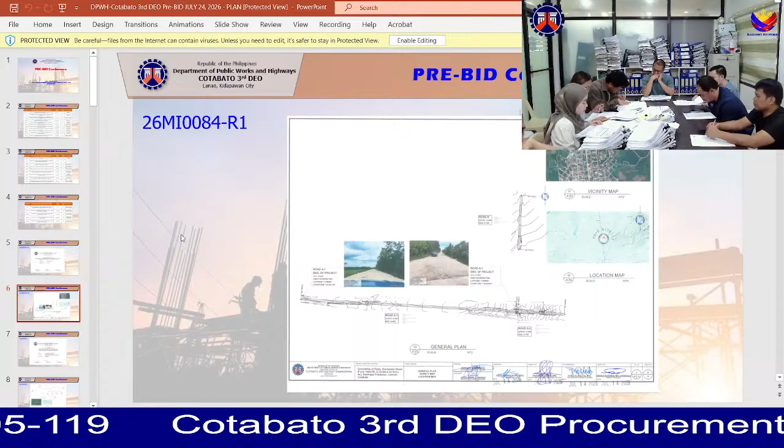Minimum equipment requirement, we have 2 dump trucks, 1 payloader, 1 bulldozer, 1 backhoe with breaker, 1 payloader at the disposal area, 1 backhoe, 1 plate compactor, 1 water truck or pump, 1 motorized road grader, 1 vibratory roller, 4 transit mixer, 2 concrete vibrator, 1 concrete batching plant, 1 concrete spreader, 1 concrete saw, 1 bar cutter, 1 bar bender, 1 cargo or service truck, 1 bagger mixer, 1 backhoe wheel mounted, 1 cargo or service truck, and 1 applicator machine, 1 kneading machine.

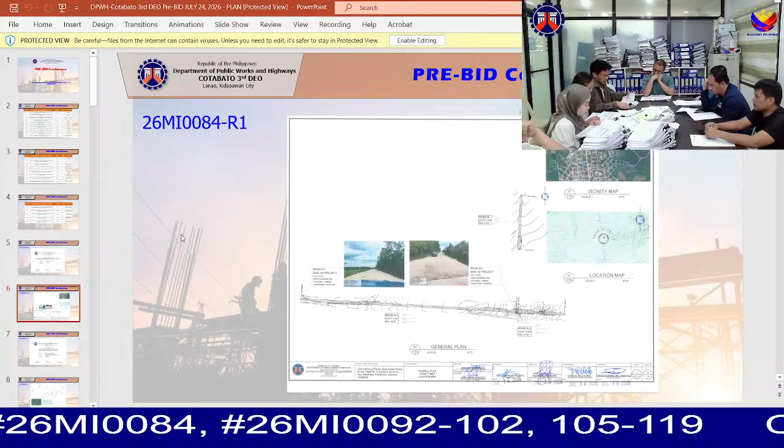For the second project, we have a contract number of 26MI0092. Project name, construction of road widening along Matalam-Lampayan-Antipas Road, kilometer 1660 plus 869 to kilometer 1662 plus 000, kilometer 1662 plus 442 to kilometer 1662 plus 653, kilometer 1663 plus 742 to kilometer 1663 plus 815, kilometer 1667 plus 000 to kilometer 1668 plus 535.

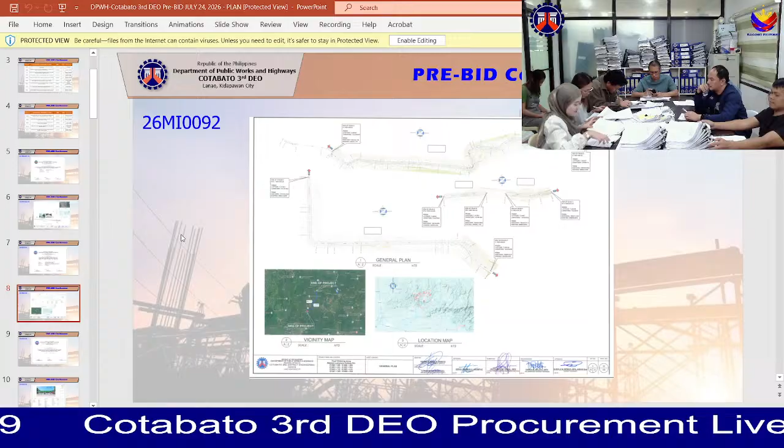Under subbase and base course, we have aggregate subbase course. Under surface courses, we have Portland cement concrete pavement, 0.15 meter thickness. Portland cement concrete pavement, unreinforced, 0.2 meter thickness. And also Portland cement concrete pavement, unreinforced, 0.28 meter thickness. Under bridge construction, we have reinforcing steel, grade 40, reinforcing steel, grade 60, structural concrete, class A, structural concrete, class B. Under drainage and slope protection structures, we have pipe culverts, 910 millimeter diameter, class 2 RCPC, manholes, 910 millimeter diameter concrete, catch basin, 910 millimeter diameter, grouted riprap, class A, stone and stone masonry.

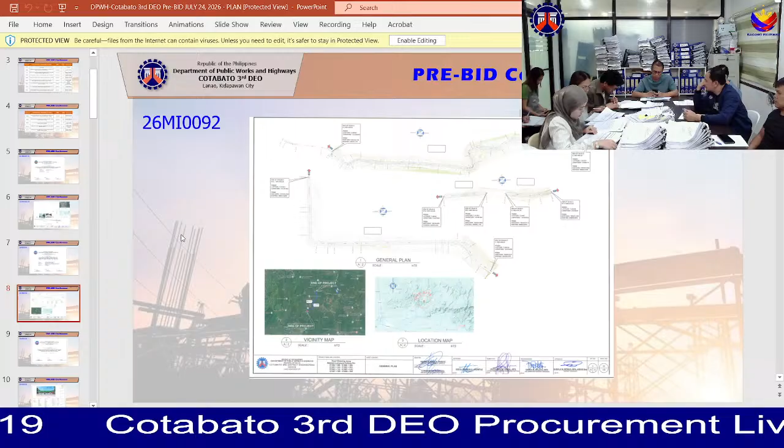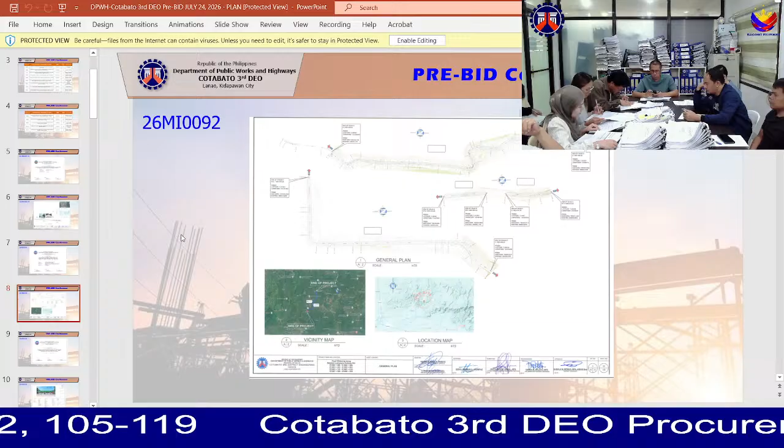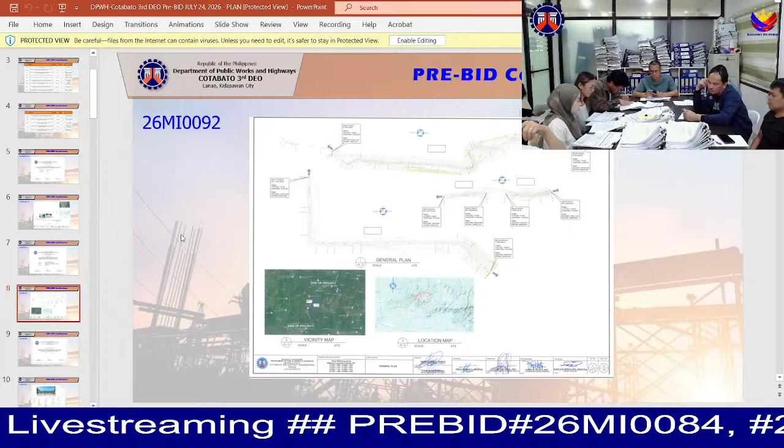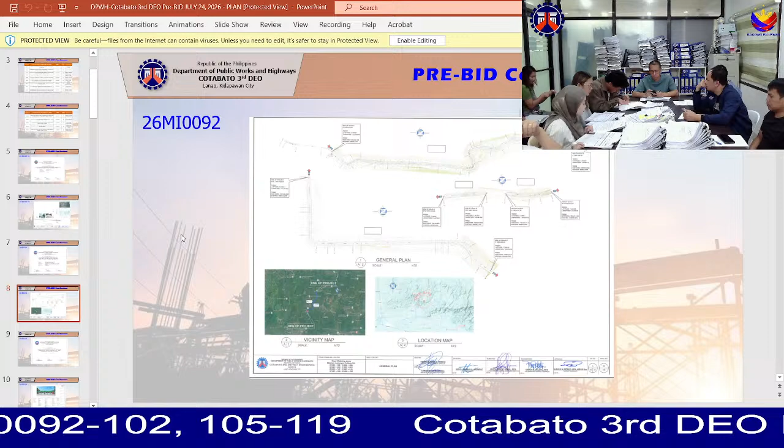Minimum equipment requirement, we have 2 dump truck, 1 payloader, 1 bulldozer, 1 backhoe, 1 chainsaw, 1 backhoe with breaker, 1 drill truck, 1 payloader, 1 plate compactor, 1 water truck or pump, 1 motorized road grader, 1 vibratory roller, 4 transit mixer, 2 concrete vibrator, 1 concrete batching plant, 1 concrete spreader, 1 concrete saw, 2 bar cutter, 1 joint sealer, 1 bar bender, 1 cargo service truck, 1 bagger mixer, 1 backhoe, wheel mounted, 1 cargo service truck, 1 applicator machine, and 1 kneading machine.

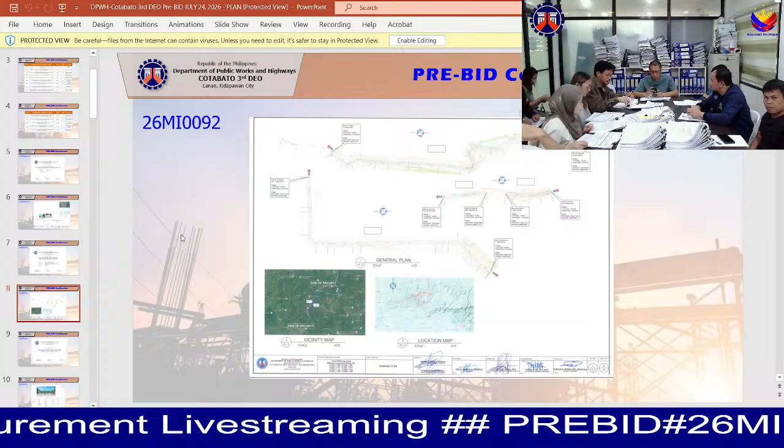For the third project, with the contract ID number 26MI0093, the project name is Construction of Multipurpose Building for SPED Students of Kabacan Pilot Center Elementary School, 130005, Barangay Poblacion, Kabacan, Cotabato. The project location is at Barangay Poblacion, Kabacan, Cotabato. The contract duration is 130 calendar days. The funding agreement is General Appropriation Act, FY 2026. Infra type is building, target amount is 1, unit of measure is unit.

The approved budget for the contract is 5,940,000 with an EL of 60,000, so the estimated project component cost is 6 million. The description of work to be done for this project are facilities for the engineer, other general requirements, earthwork, reinforced concrete, finishing and other civil works, electrical and mechanical.

Under the facilities for the engineer, we have construction of field office for the engineer. And under the other general requirements, we have permits and clearances, project field order signboard, occupational safety and health, mobilization or demobilization. Under the earthworks, we have structure excavation common soil, embankment from roadway or structure excavation common soil, embankment from borrow common soil, and gravel fill.

Under the reinforced concrete, we have structural concrete class A 28 days, reinforcing steel deformed grade 40, and formworks and falseworks. Under the finishings and other civil works, we have catch basin concrete, sewer line works, storm drainage and downspout, septic vault or tank, concrete CHB, plumbing fixtures, cold water lines, ceiling 4.5 mm metal frame fiber cement board,

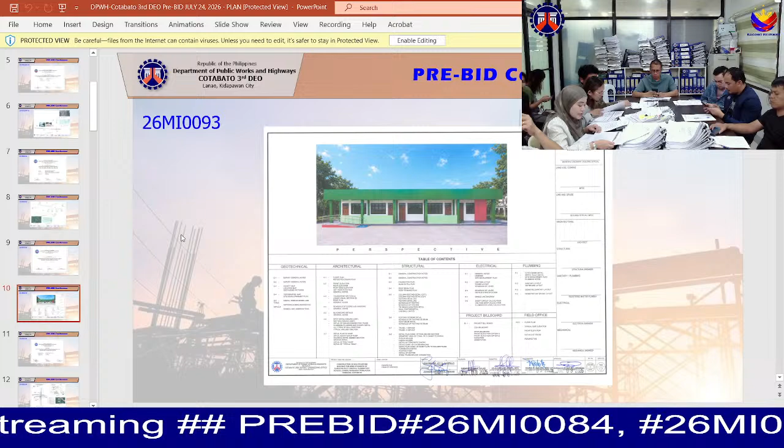ceiling metal frame, pre-painted metal panel, carpentry and joinery works, aluminum glass windows, wooden doors and windows, fabricated metal roofing accessory gauge 24, 0.701 mm gutter, pre-painted metal sheets long span, corrugated type above 0.427 mm, glazed tiles and trims, unglazed tiles, cement plaster finish, painting works masonry or concrete, painting works steel, reflective insulation, aluminum

cladding, CHB non-load bearing including reinforcing steel 100 mm, CHB non-load bearing including reinforcing steel 150 mm, metal structure accessories, structural steel trusses, structural steel purlins. Under the electrical, we have conduits, boxes, and fittings, conduit coils or conduit rocking, wires and wiring devices, panel board with main and branch breakers, and lighting fixtures.

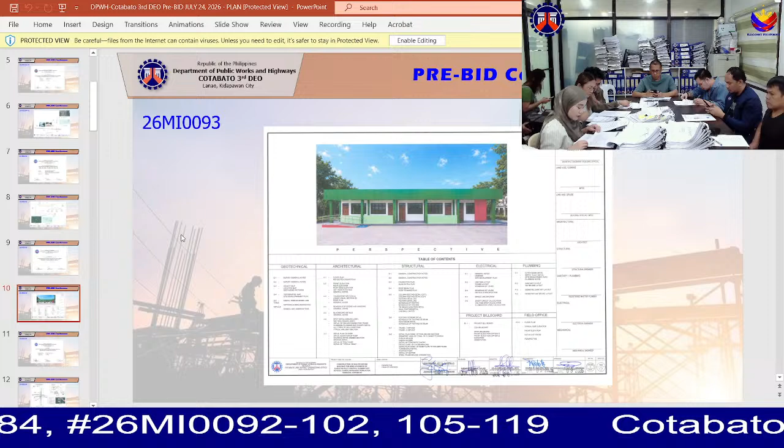Under mechanical, we have oscillating fan, ceiling fan, fire extinguisher 9.007 kilogram ABC with bracket, and fire alarm system. The minimum equipment requirement, we have one backhoe, one bar bender, one bar cutter, one shovel, vibrator, one cutting outfit, two dump trucks, one bagger mixer, one plate compactor, one truck mounted crane, and two welding machines.

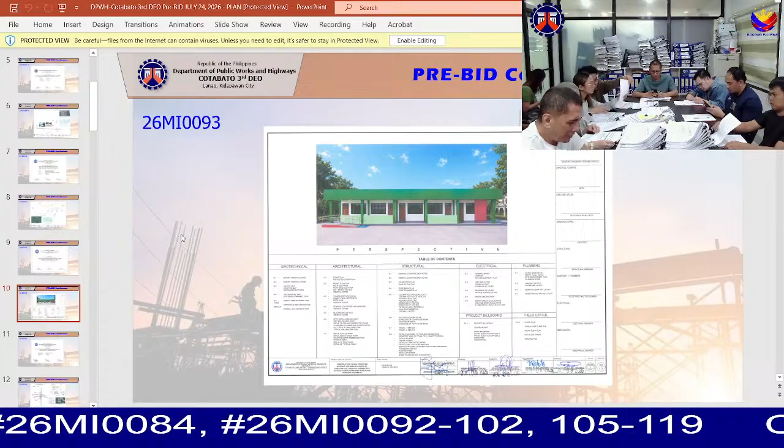Our fourth project is the retrofitting, strengthening of permanent bridges, Bual UK bridge, B01011MN along Makilala-Allah. The work location is along Tulunan, North Cotabato with a contract duration of 108 calendar days. Funding agreement is year 2026. The infra type is bridge. Target amount 1, unit of measure number of bridge. The total construction cost is 16,275,840. The EL is 332,160. And the total estimated cost is 16,608,000.

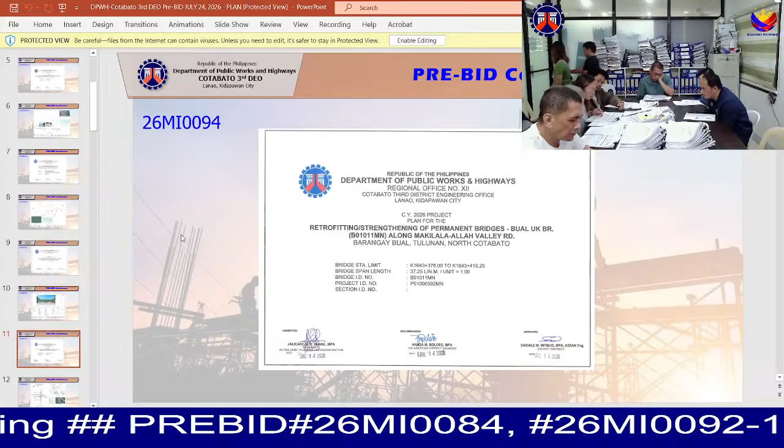The description of works to be done are the facilities for the engineers, the other general requirements, the earthworks, sub-base and base course, the surface course, the bridge construction, drainage and slope protection structures, and the miscellaneous structures. Itemized breakdown. Facilities for the engineer is the construction of field office for the engineer, the provision of furniture and fixtures, equipment and appliances for the field office for the engineer, and the provision of 4x4 type pickup service vehicle for the engineer on bare rental basis.

Other general requirements are the permits and clearances, the project billboard and signboard, the occupational safety and health program, the traffic management, mobilization, demobilization, and the removal and mitigation of bridges. For earthworks, the clearing and grubbing, individual removal of trees, the removal of structures and obstructions, concrete, the structure excavation, the foundation fill, the pipe culverts and drains excavation, and the embankment from borrow. The sub-base and base course is the aggregate sub-base course.

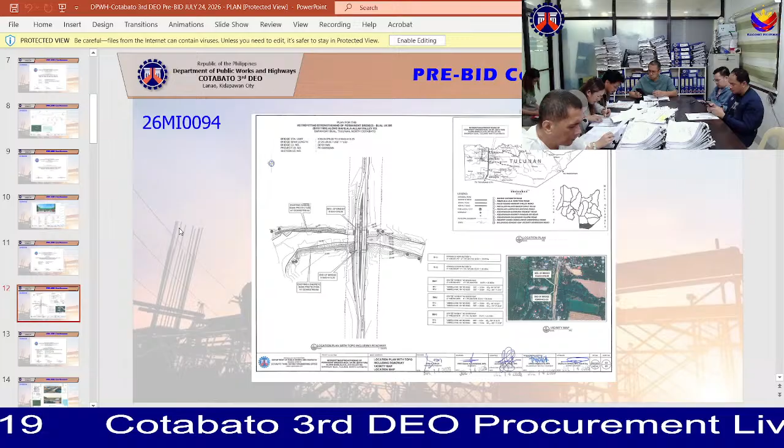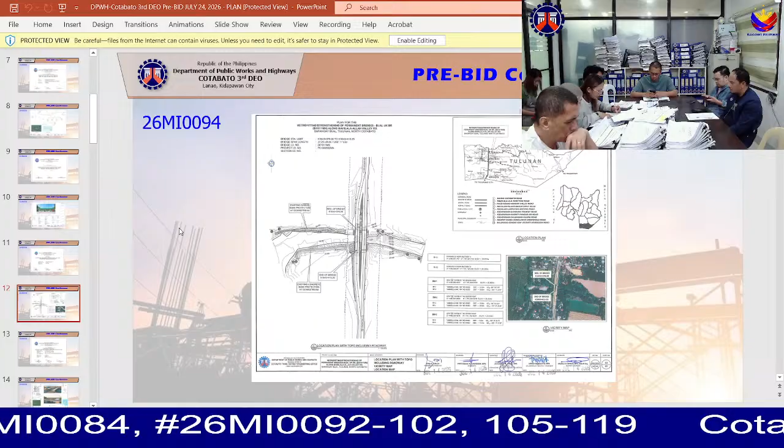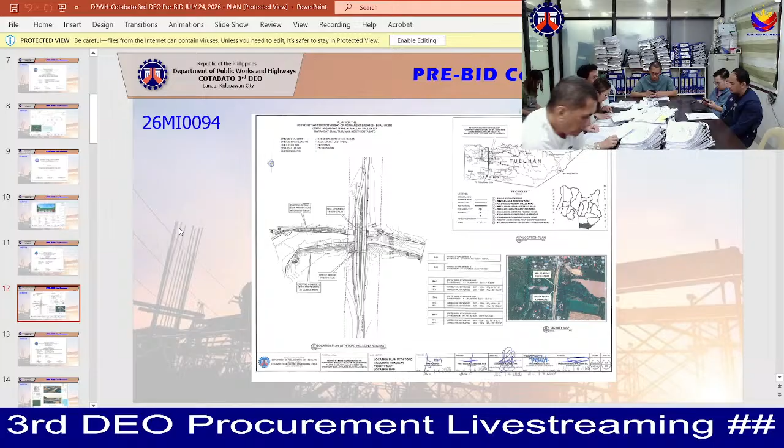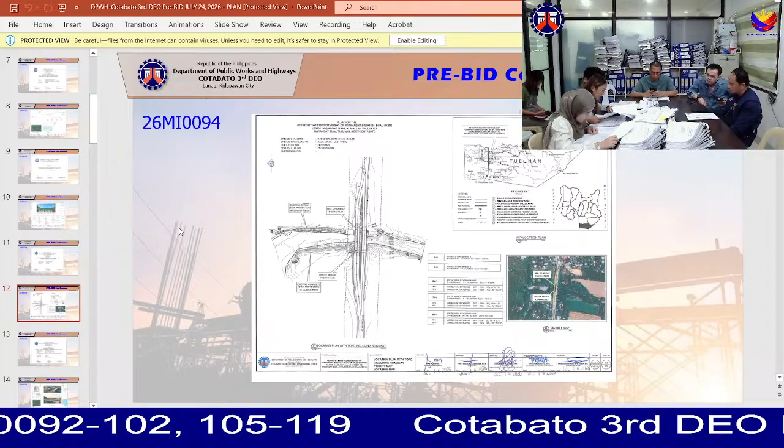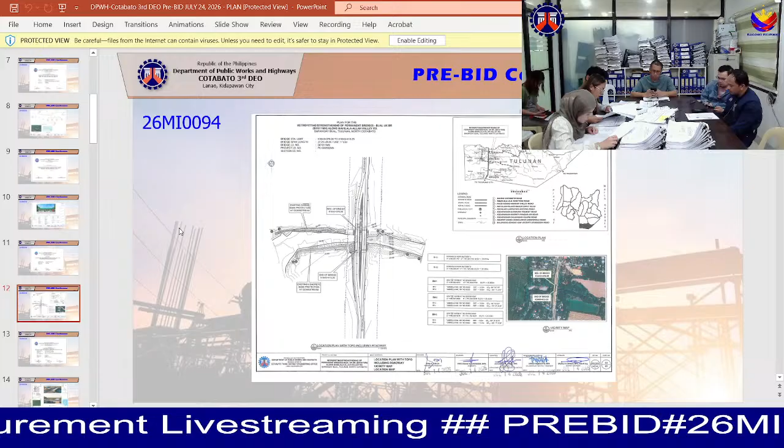dredger, one bagger mixer, one payloader, one plate compactor, four transit mixer, one truck-mounted tipping bucket, one truck-mounted crane standard lattice boom, one truck-mounted crane standard lattice boom 41 to 45 HP, one vibratory roller, one vibro hammer, one water truck or pump, one welding machine, and one welding machine driven, DC output.

For the fifth project, we have a contract number of 26MI0095, widening of bridge, BIALONG bridge 00278, along MATALAM-LAMPAYAN-ANTIPAS junction. Project location, we have Cotabato. Contract duration 190 calendar days. Funding agreement FY 2026. Infra type bridge, target amount 197.669, unit of measure square meter.

Total approved budget for the contract, we have 22,057,840. EO 450,160. And total estimated cost 22,508,000. Description of works: facilities for the engineer, other general requirements, earthworks, subbase and base course, surface course, bridge construction, drainage and slope protection structures, and miscellaneous structures.

Under facilities for the engineer, we have construction of field office for the engineer. Under other general requirements, we have permits and clearances, project billboard or signboard, occupational safety and health program, traffic management, mobilization or demobilization, and removal and relocation of utilities.

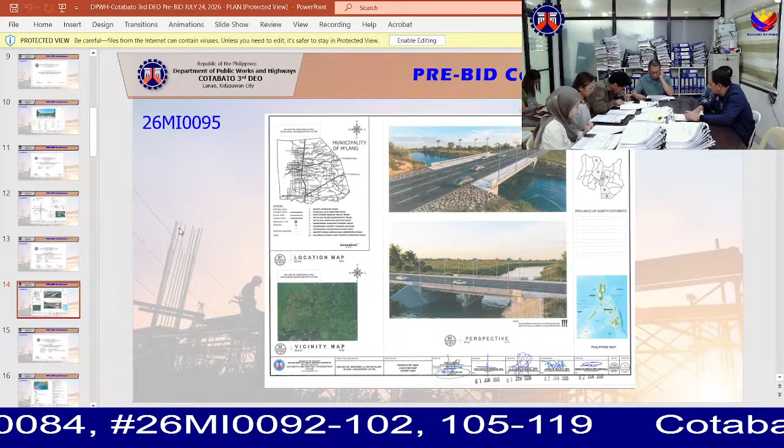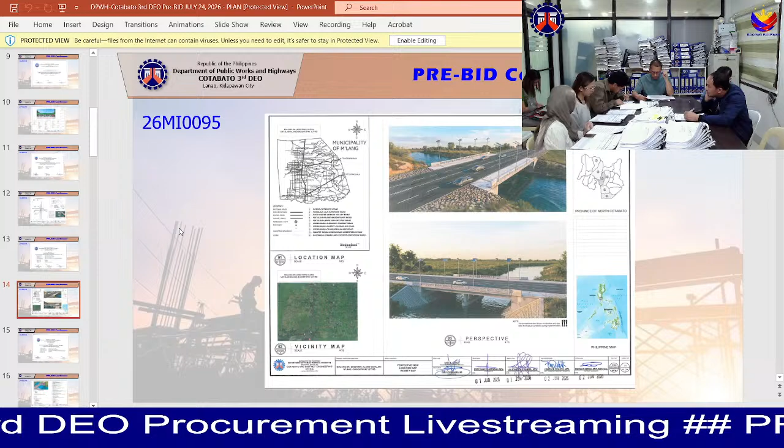mounted crane with bucket, one truck mounted crane standard, one truck mounted crane standard lattice boom, 246 HP, one vibratory roller, one vibro hammer, one water truck or pump, one welding machine gas or diesel driven, and one welding machine electrical driven.

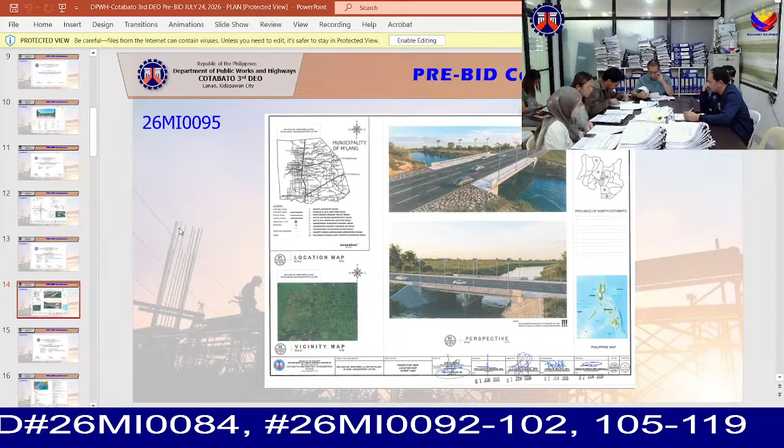For the sixth project with the contract ID number 26MI0096, the project name is Widening of Permanent Bridges - Dalapuan Bridge B01873MN along MATALAM-LAMPAYAN-ANTIPAS Road. The project location is at Barangay Chibia, Matalam, Cotabato. The contract duration is 211 calendar days. The funding agreement is National Expenditure Program CY 2026. The infra type is bridge.

The target length is 322.643 and the unit of measure is square meter. The approved budget for the contract is 36,173,760 with an EO of 738,240. So the total estimated cost is 36,912,000.

The description of works to be done for this project are facilities for the engineer, other general requirements, earthwork, subbase and base course, bridge construction, drainage and slope protection structures, miscellaneous structures, and materials details. Under the facilities for the engineer, we have construction of field office for the engineer.

Under the other general requirements, we have permits and clearances, project billboard and signboard, occupational safety and health program, traffic management, and mobilization or demobilization. Under the earthwork, we have individual removal of trees, 150 to 300 millimeter diameter small, removal of structures and obstruction, concrete, structure excavation common soil, embankment from roadway or structure excavation common soil, and embankment from borrow common soil. Under the subbase and base course, we have aggregate subbase course.

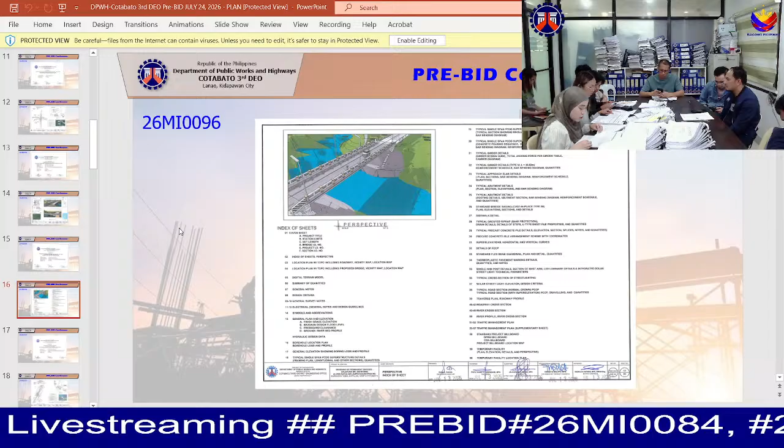Under the drainage and slope protection structures, we have grouted riprap class A, sheet piles, steel slope protection, and drain pipe galvanized. Under the miscellaneous structures, we have metal guardrail, metal beam including post single W beam, metal beam end piece fishtail, reflectorized thermoplastic pavement markings white, reflectorized thermoplastic pavement markings yellow, tapered solar LED roadway lighting 8 meters, 60 watts to 100 watts.

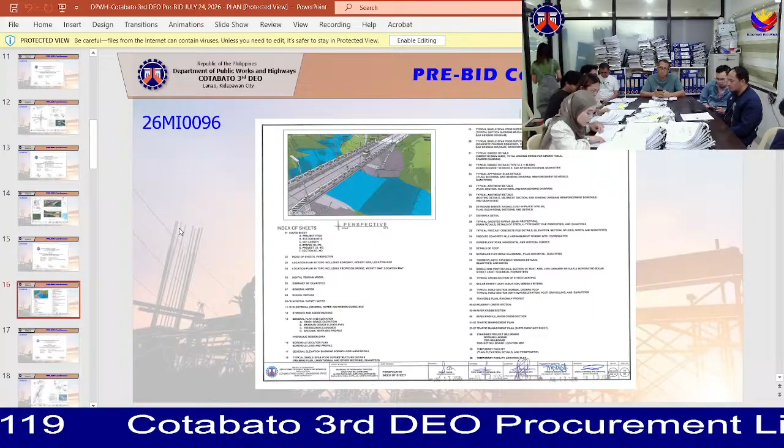The minimum equipment requirements for this project: 1 bulldozer, 1 loader, 1 motorized road grader, 1 motorized grader with scarifier, 1 vibratory roller, 1 crawler crane standard boom 21 to 25 MT, one crawler crane standard boom 36 to 40 MT, 1 crawler crane with standard boom, 1 truck mounted crane, 1 truck mounted crane 51 to 60 MT, 1 backhoe with breaker, 1 vibro hammer, 1 bagger mixer, 2 transit mixer, 2 dump truck,

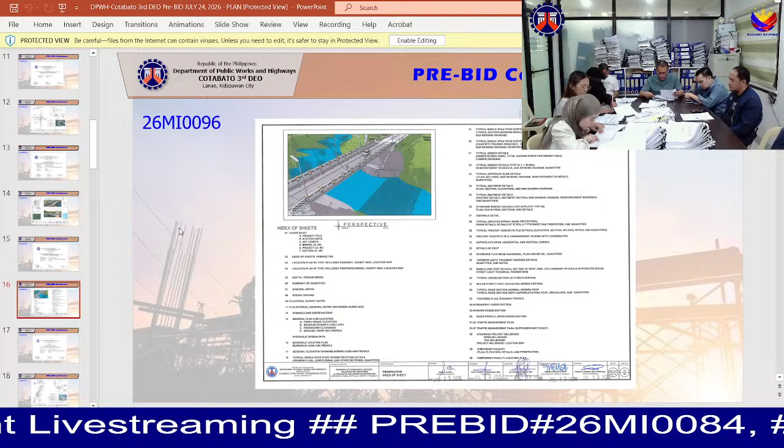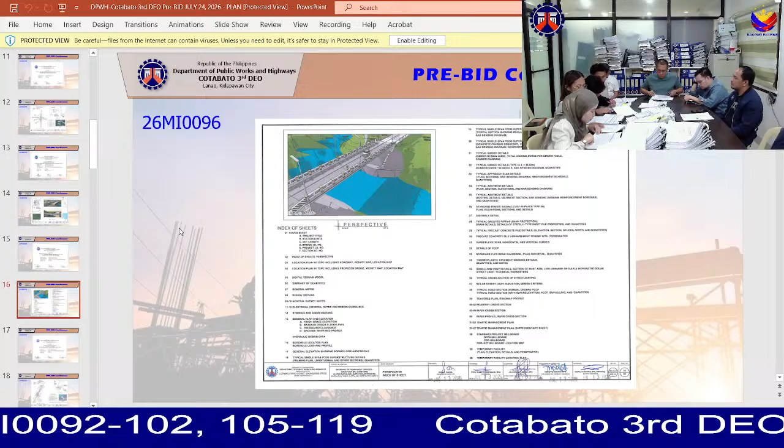1 cargo truck, 1 cargo service truck, 1 cargo truck 9 to 10 MT, 1 water truck or pump, 1 air compressor, 1 welding machine 500A, 1 welding machine 500A electrical driven, 1 cutting outfit, 1 chainsaw, 2 concrete vibrator, 1 bar cutter single phase, 1 bar bender 3 phase, 1 concrete batch plant, 1 applicator machine, 1 dolly, 1 jack, 2 jackhammer, 1 kneading machine, and 1 wood or steel log.

The seventh project is with a contract ID of 26MI0097 with a project name of Widening of Bridges, the Bridge B01H66MN along Davao Cotabato Road, Junction, Digos, to Cotabato section, with a contract duration of 188 calendar days. The project with a funding agreement of fiscal year 2026 in an item type of bridge. The target amount of 173.6128, and the unit of measure is square meter.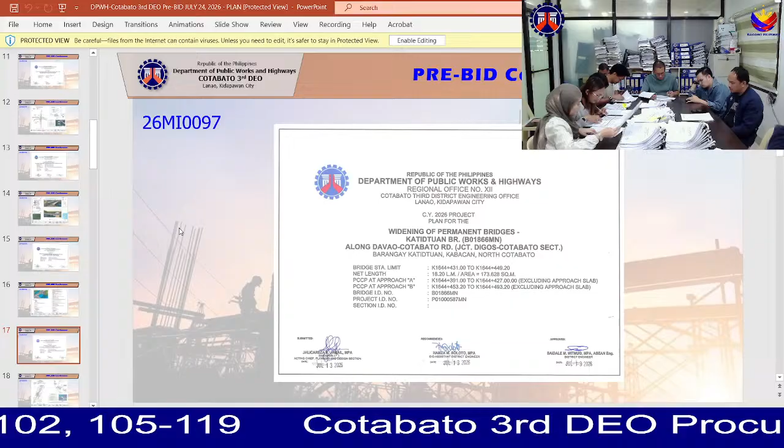The total construction cost of 19,410,860 with an EO of 396,140 and a total estimated cost of 19,807,000. Works to be done are facilities for the engineer, other general requirements, the earthworks, subbase and base course, surface course, the bridge construction, drainage and slope protection structures, and the miscellaneous structures.

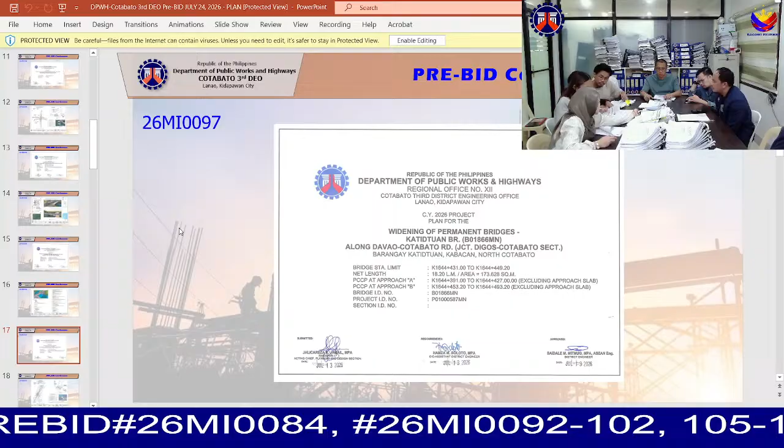Facilities for the engineer are the construction of field office for the engineer, the provision of furniture and fixtures, equipment and appliances for the field office for the engineer, and the provision of 4x4 type pickup service vehicle. Under general requirements are the permits and clearances, the project billboard and signboard, the occupational safety and health program, the traffic management, mobilization and demobilization, and the removal and relocation of utilities. Under the subbase and base course is the aggregate subbase course. Under the surface course is the Portland cement concrete pavement 0.15 meter thick 14 days, and the Portland cement concrete pavement of 0.28 meter thick 14 days.

Under the bridge construction are the precast concrete piles furnished, the precast concrete piles driven, the splicing of RC piles with epoxy, the test piles driven, the reinforcing steel grade 60, the structural concrete class A 14 days, the structural concrete class A 27.58 MPa 14 days, the pre-stressed structural concrete members, the lean concrete class B, the paint, and the form and falsework.

Other drainage and slope protection structures are the manholes, 910 mm diameter concrete, the grouted riprap class A, the sheet pile steel slope protection, and the drain pipe galvanized. Under the miscellaneous structures are the metal guardrail, metal beam, the metal beam end piece bull nose, the reflectorized thermoplastic pavement markings white, the reflectorized thermoplastic pavement markings yellow, and the concrete joint sealer.

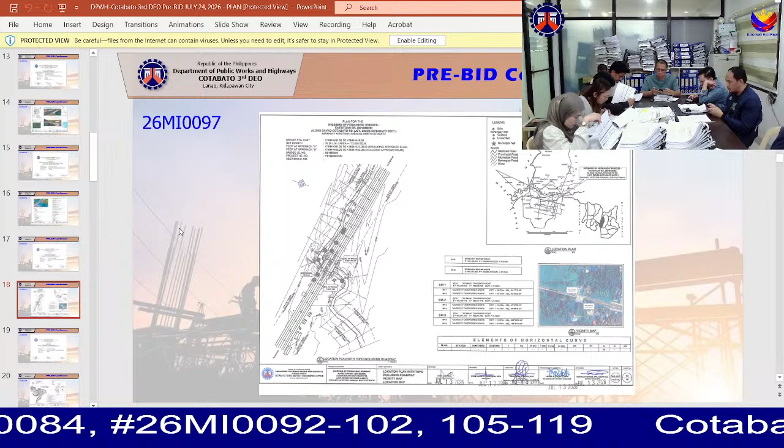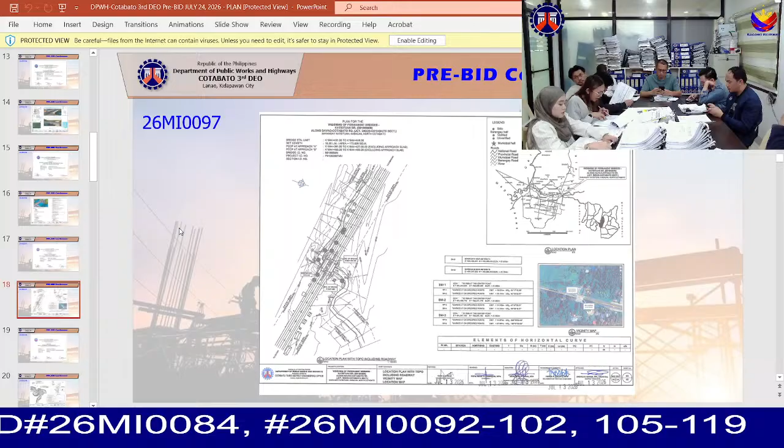1 multi-purpose amphibious dredger, 1 bagger mixer, 1 payloader, 1 plate compactor, 4 transit mixer, 1 truck mounted crane with bucket, 1 truck mounted crane with standard lattice boom, 1 truck mounted crane standard lattice boom with 246 horsepower, 1 vibratory roller, 1 vibro hammer, 1 water truck or pump, 1 welding machine gas diesel driven, and 1 welding machine electrical driven DC output.

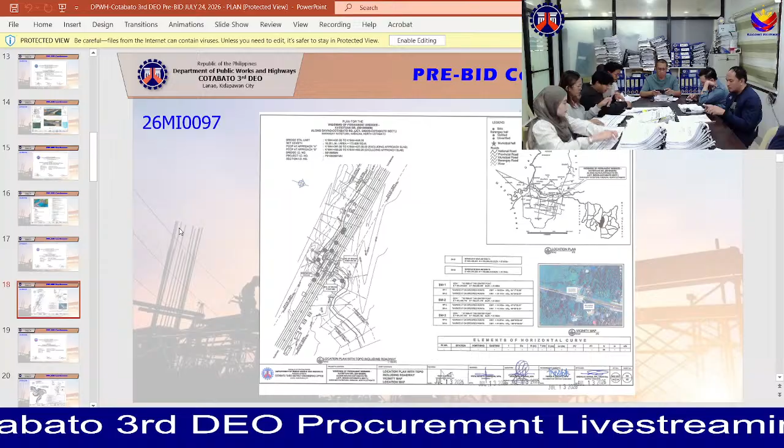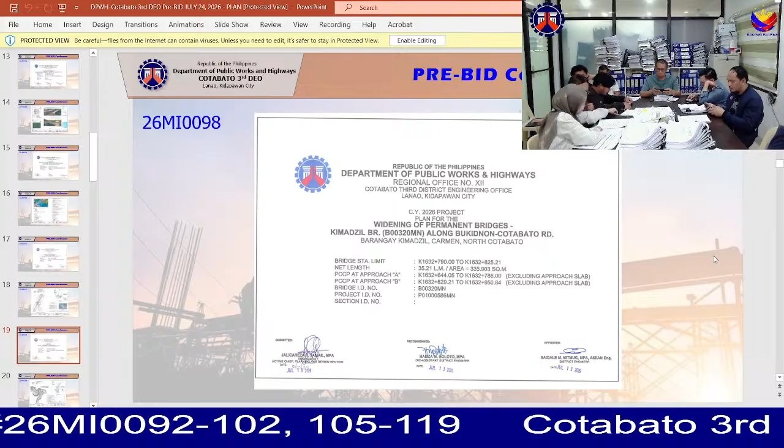For the 8th project, we have 26MI0098, widening of bridges, Kimadzil Bridge, B00320MN along Bukidnon-Cotabato Road. Work location, Carmen, North Cotabato, with a contract duration of 200 calendar days. Funding agreement, GAA FY 2026. Infra type, bridge, target amount, 335.903. Unit of measure per meter.

With an approved budget of the contract of 37,938,740. With an EO of 774,260. Project component cost, 38,713,000. And description of works to be done: facilities for the engineer, other general requirements, earthworks, sub-base and base course, surface course, bridge construction, drainage and slope protection structure, miscellaneous structure.

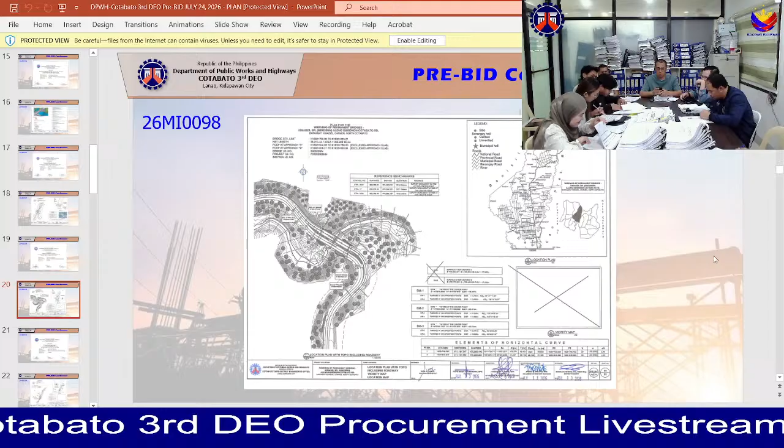Under facilities for the engineer, construction of field office for the engineer. Under other general requirements, permits and clearances, project billboard or signboard, occupational safety and health program, traffic management, mobilization and demobilization, removal and relocation of utilities. Under earthworks, we have clearing and grubbing, individual removal of trees, 150 to 300 mm diameter small, removal of structures and obstruction, concrete, structural excavation, common soil, foundation fill, embankment from borrow, common soil.

Under sub-base and base course, we have aggregate sub-base course. Under surface course, we have Portland cement concrete pavement, unreinforced, 0.15 m thick, 14 days. Portland cement concrete pavement, unreinforced, 0.20 m thick, 14 days. Under bridge construction, we have precast concrete piles furnished 400 by 400 mm. Precast concrete piles driven. Test piles furnished 400 by 400 mm. Test piles driven 400 by 400 mm.

Reinforcing steel grade 40. Reinforcing steel grade 60. Structural concrete class A 20.68 MPa 14 days. Structural concrete class A 27.58 MPa for 14 days. Pre-stressed structural concrete members type IV I-girder. Lean concrete class B 16.5 MPa. Expansion joint rubber or multiplex expansion joints 50 mm gap. Formworks and falseworks, elastomeric bridge bearings. Under drainage and slope protection structure, we have grouted riprap class A, sheet steel slope

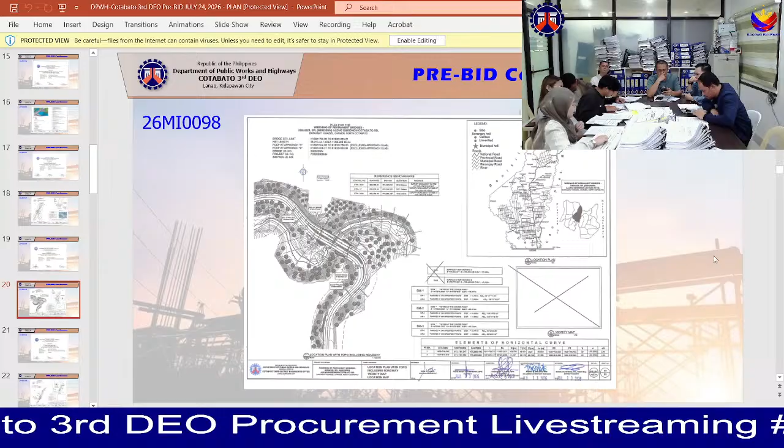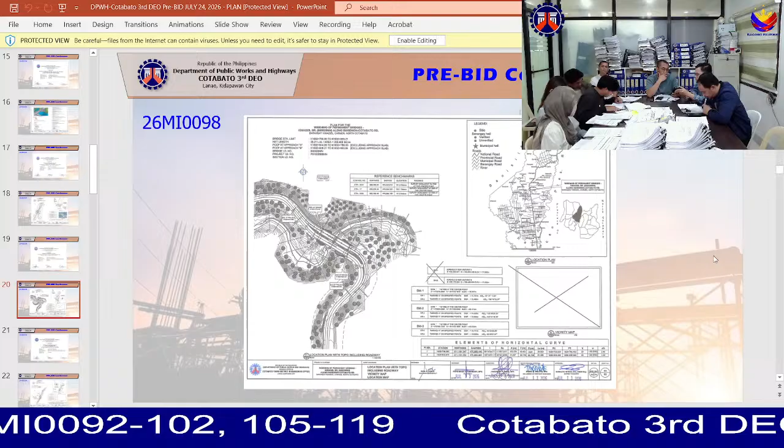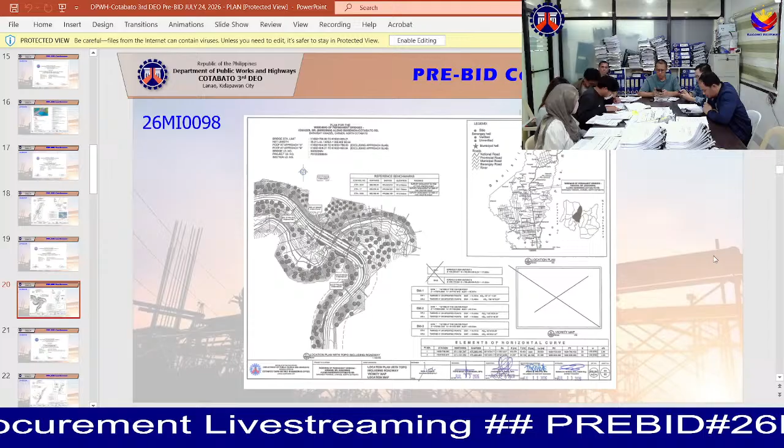hydraulic jack, two jackhammer, one joint sealer machine, one kneading machine, four low-bed trailer, one cutting outfit, one drop hammer, one motorized road grader, one multi-purpose amphibious dredger, one one-bagger mixer, one payloader, one plate compactor, four transit mixer, one truck mounted crane with bucket, one truck mounted crane standard lattice boom, one vibratory roller, one vibro hammer, one water truck or pump, one welding machine 48 HP 300A gas or diesel driven, one welding machine 500A electrical or DC output.

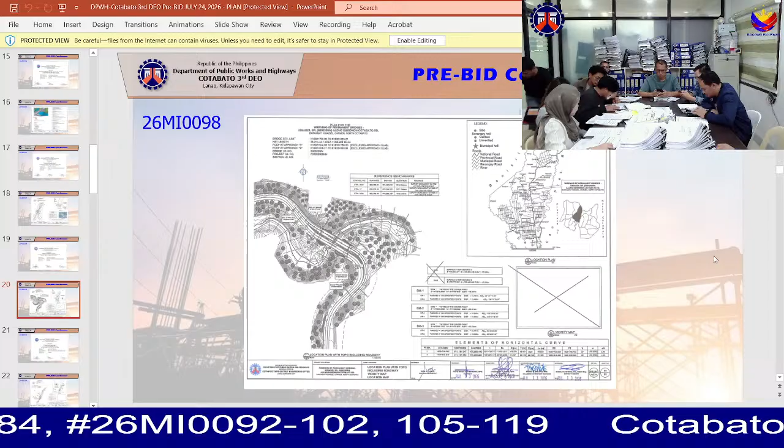For the ninth project with the contract ID number 26MI0099, the project name is Widening of Bridges-Lampayan Bridge B00281ML along MATALAM-LAMPAYAN-ANTIPAS Road. The project location is at Matalam, North Cotabato. The contract duration is 183 calendar days. The funding agreement is GAA FY 2026. The infra type is bridge. The target amount is 146.916 and the unit of measure is per meter.

The approved budget for the contract is 16,763,880 with an EO of 342,120 pesos. So the total estimated cost is 17,106,000 pesos.

The description of works to be done for this project: we have facilities for the engineer, other general requirements, earthworks, subbase and base course, surface course, bridge construction, drainage and slope protection structures, and miscellaneous structures.

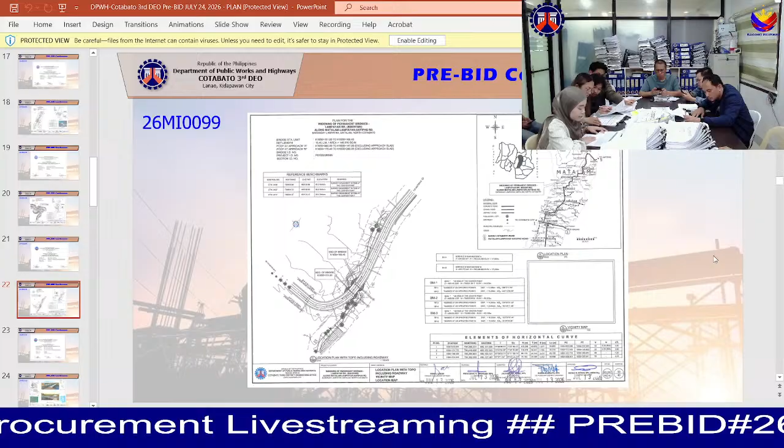The itemized breakdown. Under the facilities for the engineer, we have construction of field office for the engineer. Under the other general requirements, we have permits and clearances, project billboard or signboard, occupational safety and health program, traffic management, and mobilization or demobilization. Under the earthworks, we have individual removal of trees, 150 to 300 mm diameter, removal of structures and obstruction concrete, structure excavation common soil, and embankment from borrow common soil.

Under the subbase and base course, we have aggregate subbase course. Under the surface course, we have Portland cement concrete pavement unreinforced 0.28 meter thick 14 days. Under the bridge construction, we have precast concrete piles furnished 400 by 400 millimeter, precast concrete piles driven, reinforcing steel grade 40, reinforcing steel grade 60, structural concrete class A 20.68 MPa 14 days, structural concrete class A 27.58 MPa 14 days, lean concrete class B 16.5 MPa, paint, forms and falseworks, and elastomeric bridge bearings.

Under the drainage and slope protection structures, we have grouted riprap class A, sheet pile steel slope protection, drain and drain pipe galvanized. Under the miscellaneous structures, we have metal guardrail, metal beam including post single double beam, metal beam end piece fish nose, reflectorized thermoplastic pavement markings white, reflectorized thermoplastic pavement markings yellow.

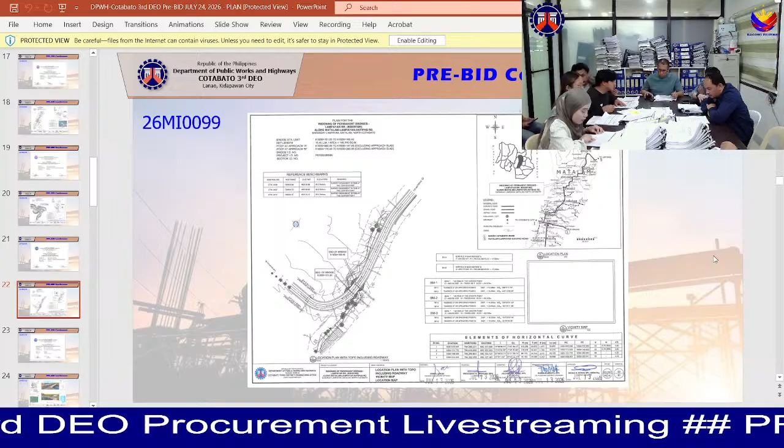The minimum equipment requirement are 1 air compressor, 1 applicator machine, 1 asphalt kettle drum, 1 backhoe with breaker, 1 bar bender, 1 bar cutter grade 40, 1 bar cutter grade 60, 1 boom truck, 1 bulldozer, 1 cargo or service truck, 1 chainsaw, 1 concrete batch plant, 1 concrete saw, 1 concrete spreader, 2 concrete vibrator flexible shaft, 1 crawler crane with bucket, 1 crawler crane standard boom 26 to 40 MT, 1 service crane or crawler crane, 1 diesel hammer,

2 dump truck, 1 grouting machine, 1 hydraulic jack, 2 jack hammer, 1 joint sealer machine, 1 kneading machine, 4 low bed trailer, 1 cutting outfit, 1 drop hammer, 1 motorized road grader, 1 multi-purpose amphibious dredger, 1 one-bagger mixer, 1 payloader, 1 plate compactor, 4 transit mixer, 1 truck mounted crane with bucket, 1 truck mounted crane 238 HP, 1 truck mounted crane 246 HP, 1 vibratory roller, 1 vibro hammer, 1 water truck or pump, 1 welding machine gas or diesel driven, and 1 welding machine electric driven.

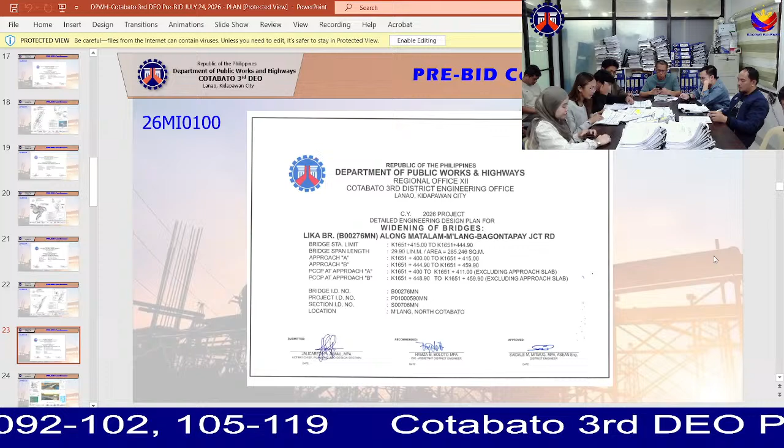The 10th project is with a contract ID of 26MI0100 with the project name of Widening of Bridges, bridge B00276MN along Matalam-M'lang-Bagontapay Junction Road with the work location at M'lang, Cotabato. The contract duration is 196 calendar days. The funding is fiscal year 2026 with the contract type of bridge, target amount of 285.246, and the unit of measure is square meter. The total construction cost is 31,762,780 with an EO of 648,220

and a total estimated cost of 32,411,000. Works to be done are facilities for the engineer, other general requirements, earthworks, subbase and base course, surface course, bridge construction, drainage and slope protection structures, and miscellaneous structures. The itemized breakdown. Under the facilities for the engineer are the construction of field office for the engineer, the provision of furniture and fixtures, equipment and appliances for the field office for the engineer, and the provision of 4x4 type pickup service vehicle for the engineer on a rental basis.

Under the other general requirements are the permits and clearances, the project billboard and signboard, the occupational safety and health program, the traffic management, the mobilization, demobilization, and the removal and relocation of utilities. Under the earthworks, the clearing and grubbing, the individual removal of trees, the removal of structure and obstruction, the structure excavation, the foundation fill, the pipe culverts and drain excavation, and the embankment from roadway. Under the subbase and base course is the aggregate subbase course. Under the surface course is the Portland cement concrete pavement with 0.15 and 14 days, and the Portland cement concrete pavement with 0.28 and 14 days.

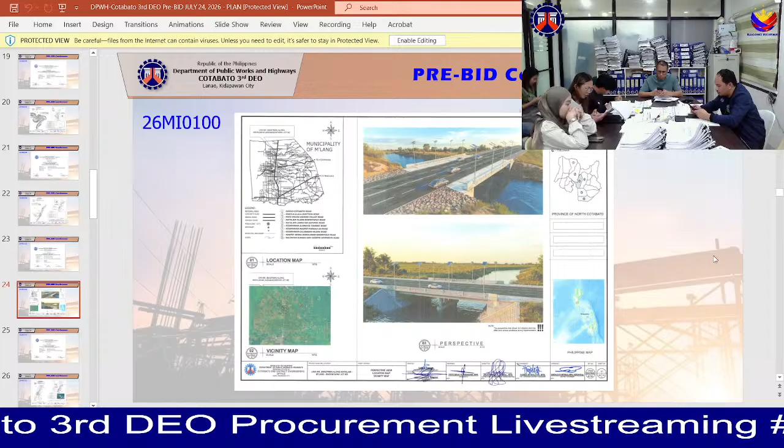The minimum equipment requirement are 1 air compressor, 1 applicator machine, 1 asphalt kettle or drum, 1 backhoe with breaker, 1 bar bender, 1 bar cutter with 25 mm per bar, 1 bar cutter with 42 mm maximum rebar, 1 boom truck, 1 bulldozer with ripper, 1 cargo service truck, 1 chainsaw, 1 concrete batch plant, 1 concrete saw, 1 concrete spreader, 1 concrete vibrator, 1 crawler crane with bucket, 1 crawler crane with standard boom, 1 service crane or crawler crane, 1 diesel hammer,

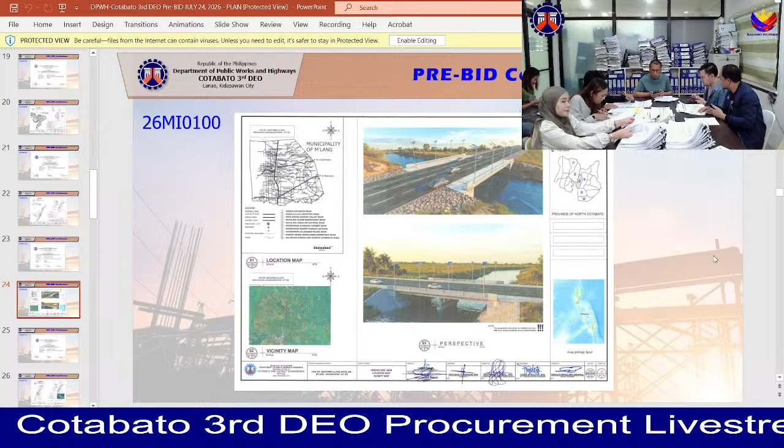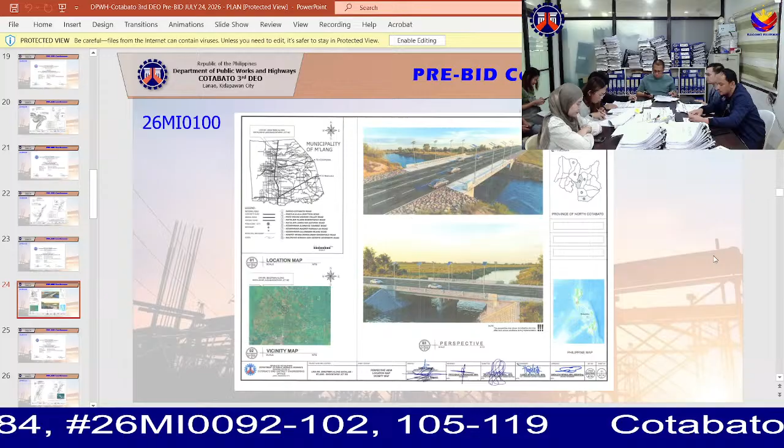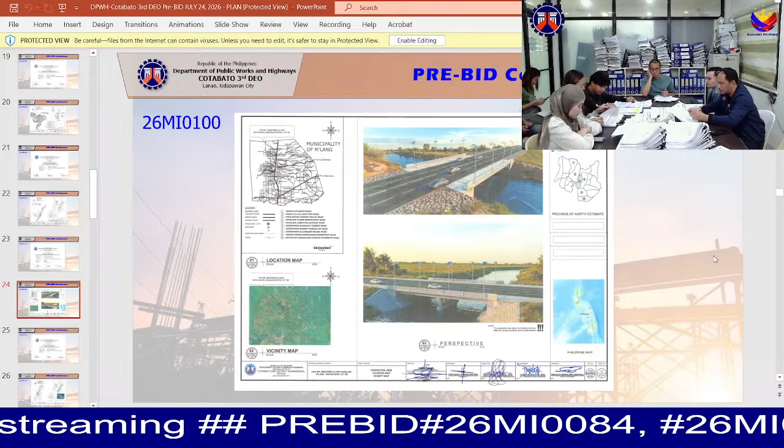Development Project 26MI0101. Widening of permanent bridges, Manubuan Bridge, B01933 along Davao-Cotabato Road, Junction Digos Cotabato Section, at Barangay Manubuan, Matalam, Cotabato. The contract duration is 200 calendar days. Funding agreement GAA CY 2026. Type: bridge, target length 179.352, unit of measure per meter. With an approved budget of the contract of 20,292,860, with an EA of 14,140. Estimated project component cost 2,707,000.

Description of the work to be done: facilities for the engineer, other general requirements, earthwork, sub-base and base course, bridge construction, drainage and slope protection structures, miscellaneous structures. Under facilities for the engineer, construction of field office for the engineer. Under other general requirements, permits and clearances, project billboard, occupational safety and health program, traffic management, mobilization and/or demobilization. Earthwork: individual removal of trees, 150 to 300 mm, removal of structure and obstruction concrete, structure excavation, embankment from roadway or structure excavation common soil, embankment from borrow common soil. Under sub-base and base course, we have aggregate sub-base course.

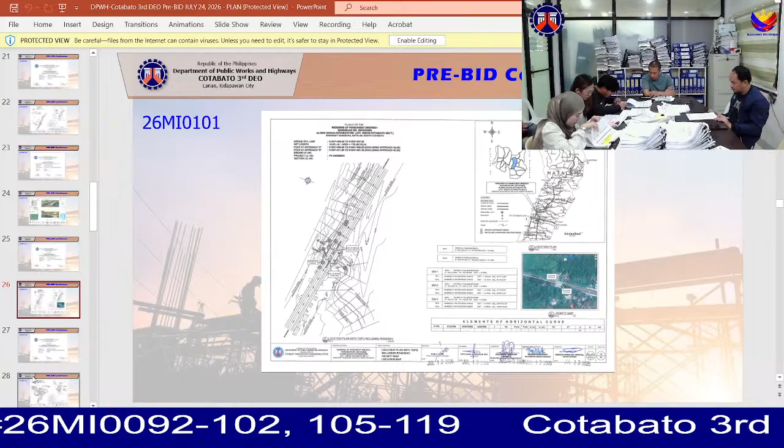Drainage and slope protection structure, we have grouted riprap class A, sheet piles or steel slope protection, drain pipe, galvanized. Miscellaneous structures, we have metal guardrail or metal beam, including post single with W beam, metal beam end piece fishtail, reflectorized thermoplastic pavement markings white, reflectorized thermoplastic pavement markings yellow, solar LED roadway lighting 60W to 100W.

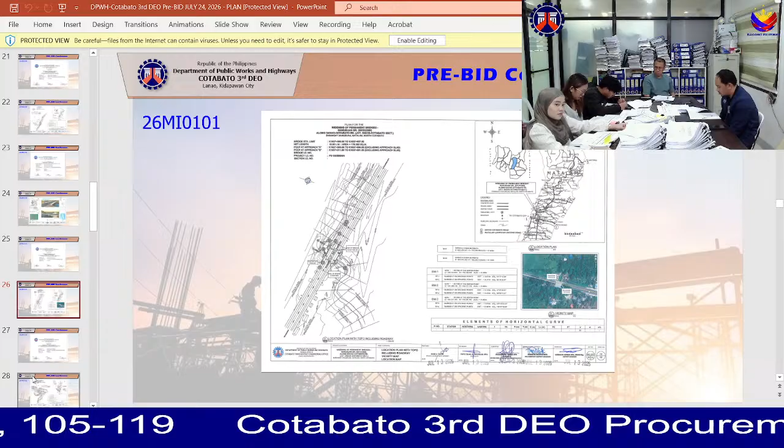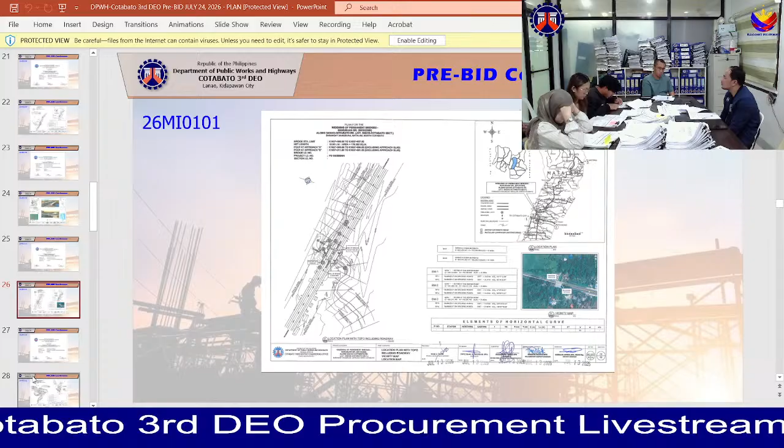Minimum equipment requirement: 1 bulldozer, 1 payloader, 1 motorized road grader, vibratory roller, plate compactor, crawler crane standard boom 21 to 25 MT, crawler crane standard boom 36 to 40 MT, crawler crane with bucket, one truck-mounted crane standard lattice boom, one truck-mounted crane standard lattice boom, one truck-mounted crane standard lattice boom, one backhoe with breaker, one diesel hammer, one vibro hammer, one bagger mixer, one transit mixer, two dump trucks, one cargo truck, one cargo or service truck 2 to 5 MT, cargo truck 9 to 10 MT,

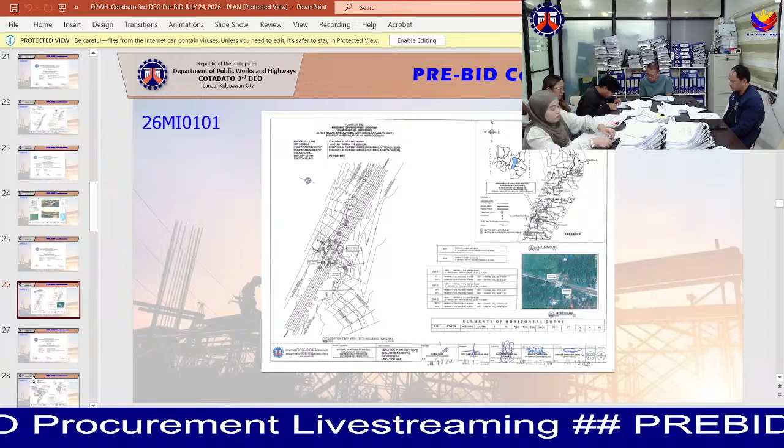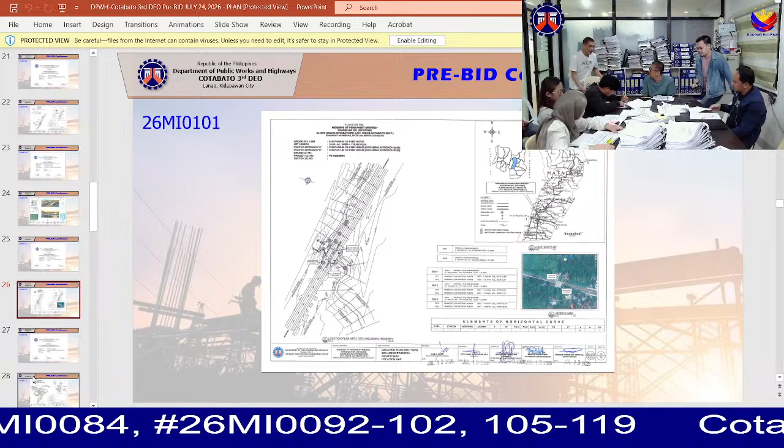water truck or pump, air compressor, one welding machine 500A, one welding machine 500A electrode oven, one cutting outfit, one chainsaw, two concrete vibrators, one bar cutter single phase, one bar bender 3 phase, one concrete batch plant, one applicator machine, one rock hammer, one dolly, two jackhammers, one kneading machine, and one steel ladder.